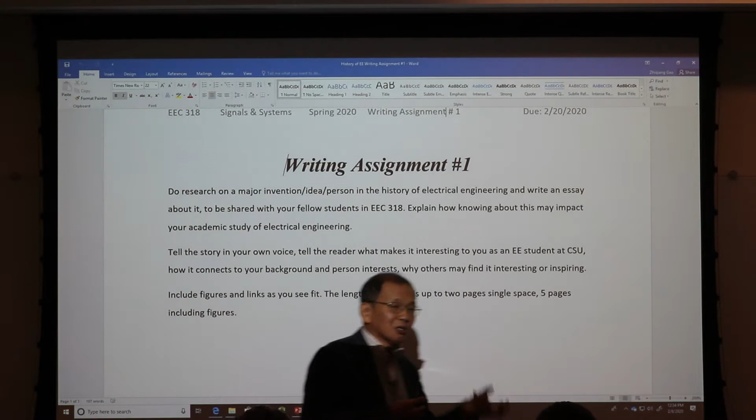So I want to use this maybe as a way to help you rediscover your passion for learning, after all these courses in science, mathematics, chemistry, physics, where the stuff is crammed down on you. I want you to rediscover, hey, I study engineering because of this. I study engineering because I one day want to make a discovery, however small, a discovery, something hasn't been done before.

So this is the general motivation behind it. Going forward, I'd like to use this maybe as a starting point to write a script. Based on your essay, maybe write a script, produce a 3-minute video by the end of the semester. Tell your story. Tell your story to the world.

Okay, and that's an individual effort. And team-wise, you have 9 teams, so everyone on your team write something, right? And maybe the team together can decide we want to produce a team video related to our project. So that's up to you, that's up to the team.

But this is an individual one. I want to see from everyone. I want to know about you. I want to see what you did. I want to see what interests you. And to some extent, I'd like to advise you on your career path.

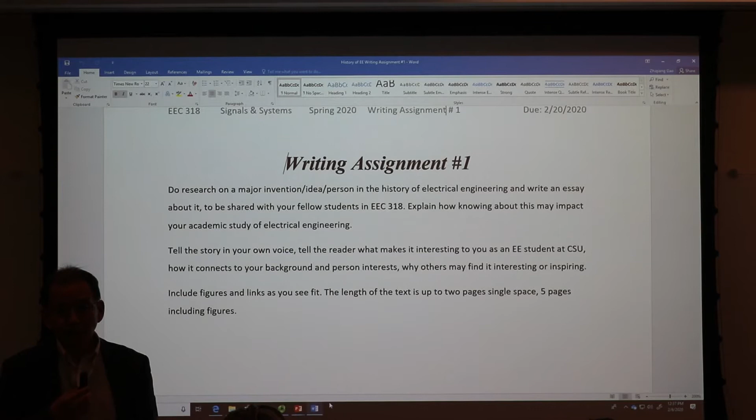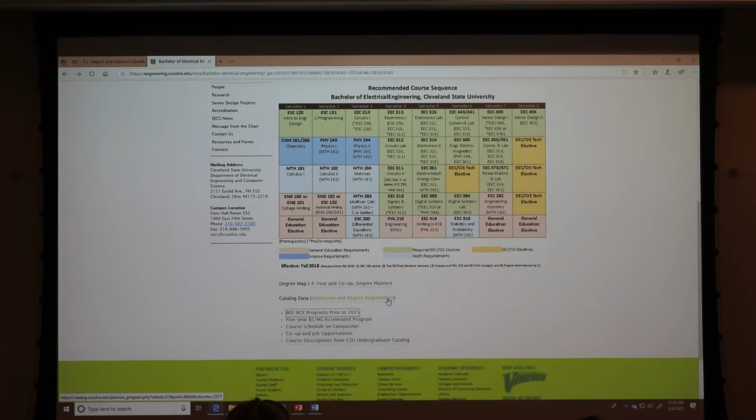Let's move on to the website. I want to go back to this chart, the degree map, where in this semester you're taking Electronics 1. I think most of you are taking Electronics 1, Circuit Lab, Circuit 2, and Signals and Systems. I want to remind you what this course covers and overlaps with these classes.

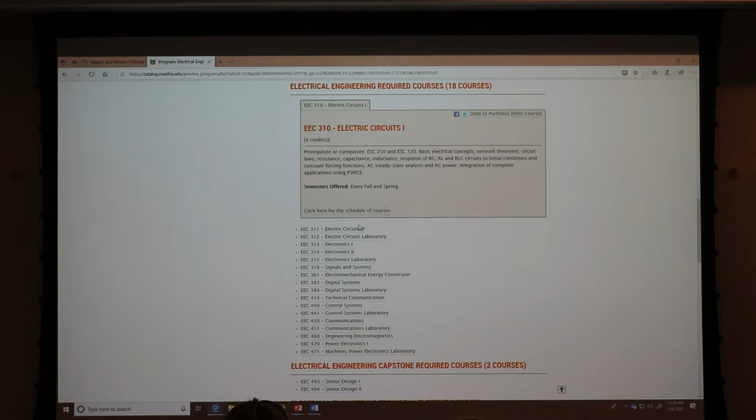For example, in Circuit 1 you already took, you used computer simulation, you used the RL circuit. I want to use that as a jumping point, and this is one you are currently taking.

You're doing AC circuits, magnetically coupled circuits, transformers, frequency response, resonance, transfer function, Fourier transforms. So that course is going to cover a lot of nuts and bolts.

Instead of repeating that here, I'm going to show you how you use it for practical purposes, to give it life, to show why such tools are important, and also who invented this and what problem they were facing.

And also in electronics, you also see frequency response. So you see this everywhere — the Bode plot, the frequency response, the Bode plot.

So here we are in signals and systems. We covered it, but we covered it in the context of engineering problems, solving engineering problems in communication, in controls. And in our case, we'll start with controls.

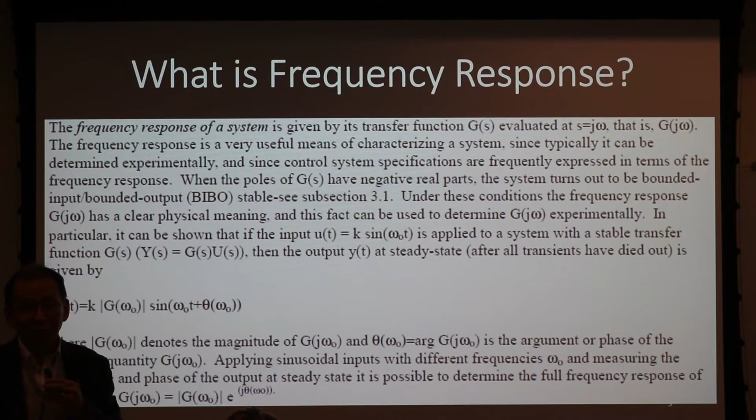Ask those seniors why they're taking this class, why they're still finding it useful. So that's frequency response in short — the short definition, the short statement. The nuts and bolts are, I think some of you already did it in your project.

You told me that you have a circuit, you derive the transfer function, and from the transfer function you set S equal to J omega, then you graph it. That's called a Bode plot.

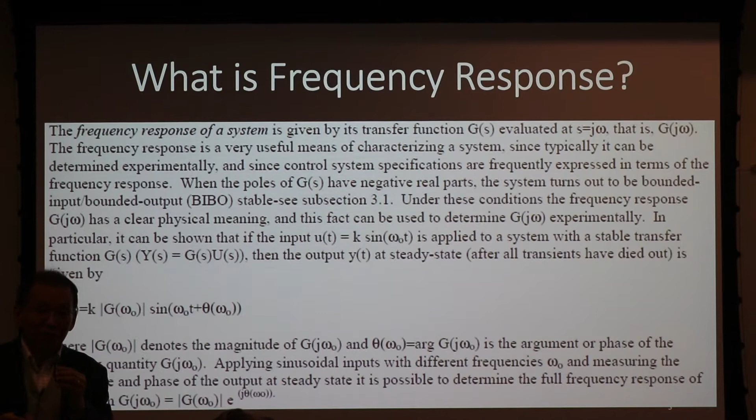Some of you already done it. Even if you haven't, it's not the end of the world. It can be done rather straightforward. Bode is known for making it simple for us — you can use straight line approximation to quickly sketch a Bode plot, a frequency response of a system, and from the sketch you already know what the system does. Simple and powerful. That's why Bode was awarded a large military contract during the Second World War.

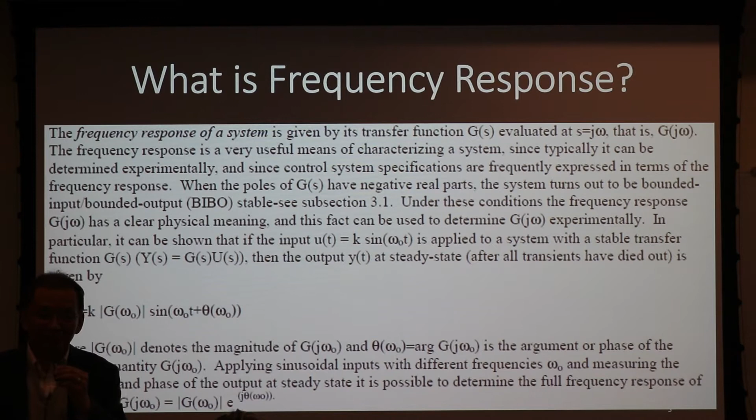He outcompeted the MIT professors who were knee-deep in mathematics. His solution, although maybe a little less superior, was so simple and intuitive that the military adopted his method. That's the Bode plot - that's why we're still talking about it today. Bode made it easy for us. We should be thankful, not afraid of it, not scared of it. There's no reason for that.

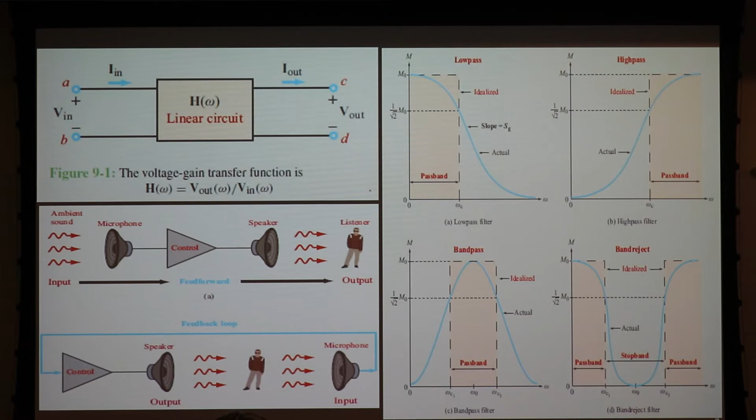So that's frequency response, and I went over this last time. Low pass, band pass, high pass - very intuitive in terms of magnitude response. And also, what does it do for us? What can we do with frequency response?

I gave you this example last time, and I'm going to use it again today, so keep it in mind. I want to refresh your memory. This is motor control, right? And this is the coil. I sub A, armature current - that's the electrical part, the power side. That's the mechanical side. You're using the motor to drive something, to drive a load, in a factory for moving parts.

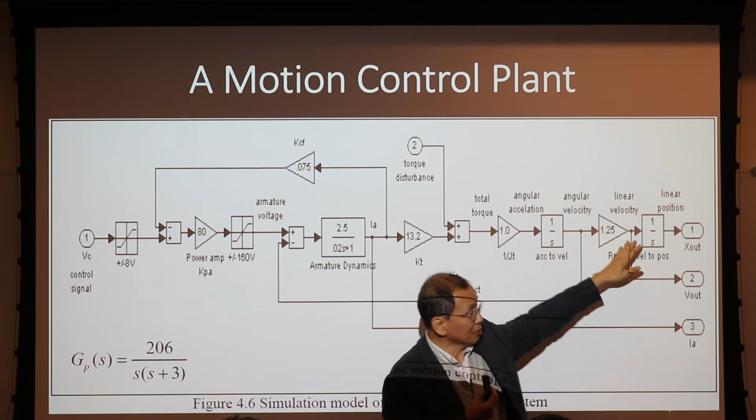Be careful - the load will have a force coming back into your system. We call it load disturbance, and the load is not easy to handle. Then the torque, the acceleration, get to a velocity, get to position after 2 integrators. So 2 integrators, and the torque becomes a final motor position.

Devin: I'm sure this might be a stupid question, but... Can I take a picture? Of course. Just don't have me in it.

For seniors, for 440, isn't this one of the problems you're solving? Could be, maybe - maybe you haven't seen it yet. So I'm giving you something that senior students see later in the semester. This is what I mean by putting the problem in front of you. Every motion control engineer faces this problem. So that brings all the attention, all the focus: what do I need to know to solve this problem, to solve it better than anybody else?

Let me ask you a question. I give you a simplified model, and I said this model can be explained from a frequency response. How? We know given the transfer function, make S equal j omega, and then you can graph it - that's how you go from transfer function to frequency response. But it seems that I suggested the reverse: that this is the system, this is the input, there's the output, and I can go by definition of frequency response and find this transfer function. How do I do that?

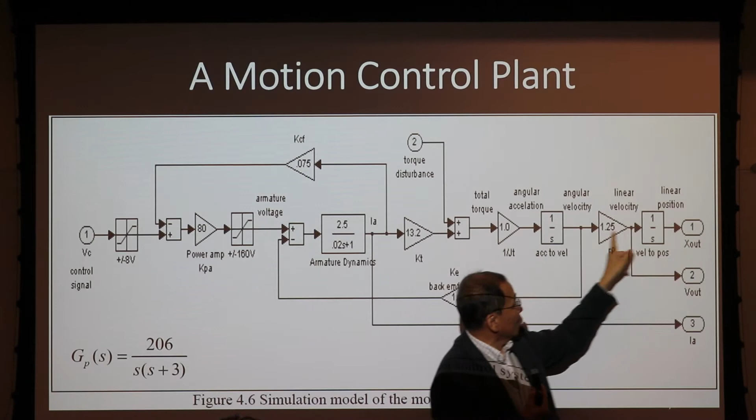Inject a known sinusoid into the voltage here. And then what? Either compare the output here or take the velocity from here. I actually did this 30 years ago in the lab when I was a TA. There was a DC motor, and I put a signal generator's output to the voltage input of the power amplifier, and I changed the frequency. Then I get a set of points, I connect them, and I get a Bode plot. From the Bode plot, I can get the transfer function.

Very easy - no physics. We don't have to be a physicist to understand how the motor works. We don't even have to know Newton's law of motion. A lazy method, but nonetheless very effective. There's one overhanging question though - you should have observed and asked it, but maybe you're not used to it yet. Let me tell you what question you should have asked.

Look at this diagram - how many S do we have in there? How many terms have S in the denominator? Two or three? So yeah, these two are obvious: from torque to position, motion, Newton's motion - you give a force proportional to acceleration, but from acceleration to velocity is an integrator, and from velocity to position is another integrator.

So these are obvious in the motion system on the mechanical side. But what about the electrical side? Do we have some dynamic there? Do we have energy storage? We do - that's the coil, that coil in the motor. Derek, you showed us the coil last time, right? That's an energy storage device - that's got to have S in there, at least one. See? Engineering is not difficult, it's intuitive - unless it's taught by a mathematician.

So we have three energy storage, or three dynamic components in here. One is the motor. Look at this. You see the transfer function 2.5 over 0.02S, 0.02S plus 1.

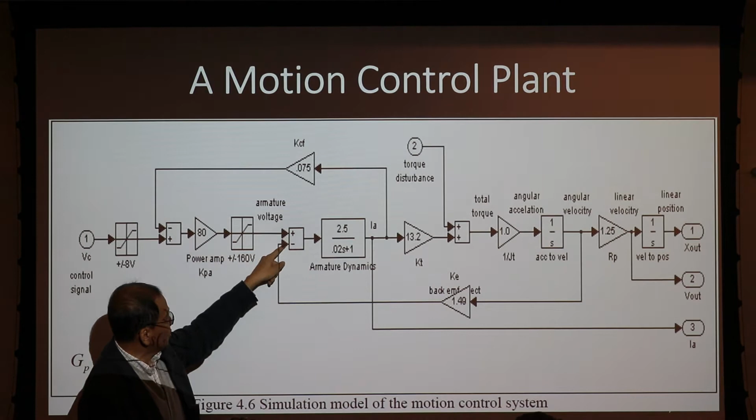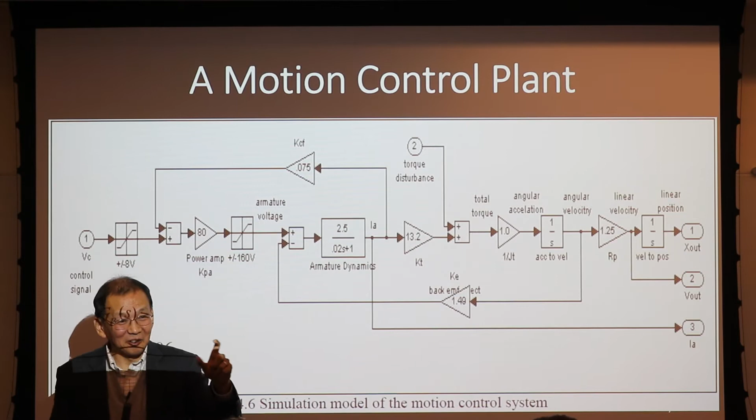So you have voltage coming in, and you have current going out. That's your coil, no? It's a coil. It's an inductor, we just wrote it differently, but it's a coil, right? So that's the transfer function of a coil. You put the voltage in, you get current out.

See? Mathematics is easy if we know what is going on. But the connection is powerful. There are many people who can see the coil, who can touch the coil, hopefully without electricity in it, but not able to see the mathematics, not able to think about it as an inductor, as an AC circuit.

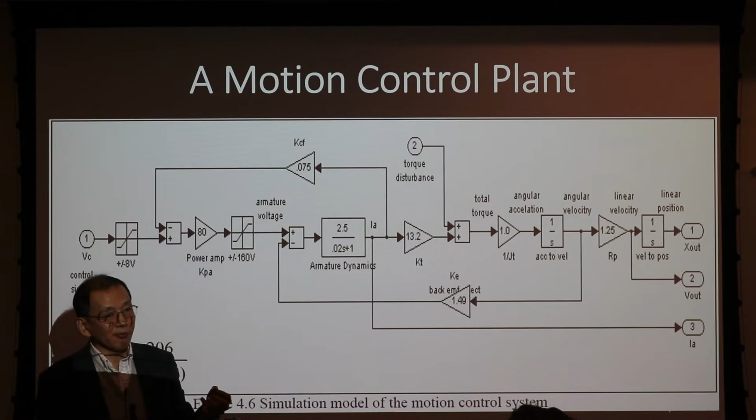So being able to write the transfer function is knowledge all electrical engineers must have. And this is your circuit. Come on, this is a circuit, right? You have an inductor. You put the voltage in here, you induce a current, right? So what's the transfer function?

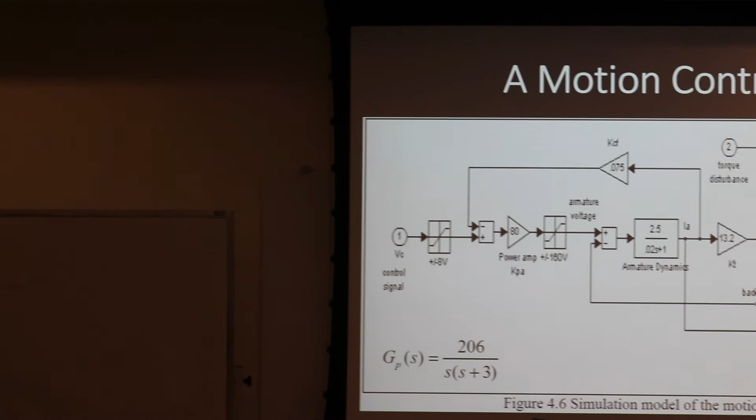What's the transfer function? Let's call it V of S. Let's call it I of S, the current. Right? So what is the current? What is the transfer function of the output over the input?

So the impedance is L times S, right? That's the impedance in frequency domain. Then you avoid the differential equation altogether, right? And the impedance of this is R. So what is this?

The voltage drop. That's a loop, right? So the voltage drop, this is IA times R, right? That's voltage drop here. The voltage drop here is what? IA times SL, right? Yes.

This is Ohm's law generalized to impedance, right? So now I can write V of S equals IA of S times R plus SL. No? Yes?

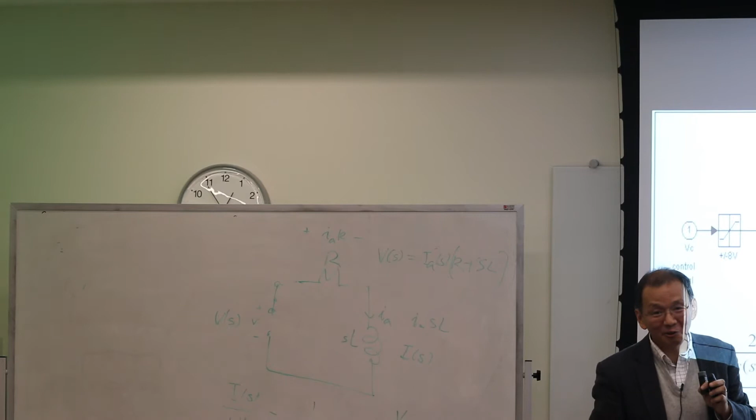That's where you get this. That's how you get this. That's a transfer function. Can you do it? Can you do it yourself? Yeah, probably yes, right? Probably yes. That's your quiz question. That will be in your quiz, that will be in your exam, in some variations.

You like that? There's no surprises. This is the engineering skill we are trying to let you have, not some hoops to let you jump through. And everything we do for a purpose. So getting so now we see the transfer function of this, and represent a real physical device.

Right? Moreover, I look at this transfer function, I see a time constant. Do you see a time constant? I see a time constant. And this time constant tells me how fast this inductor is charging.

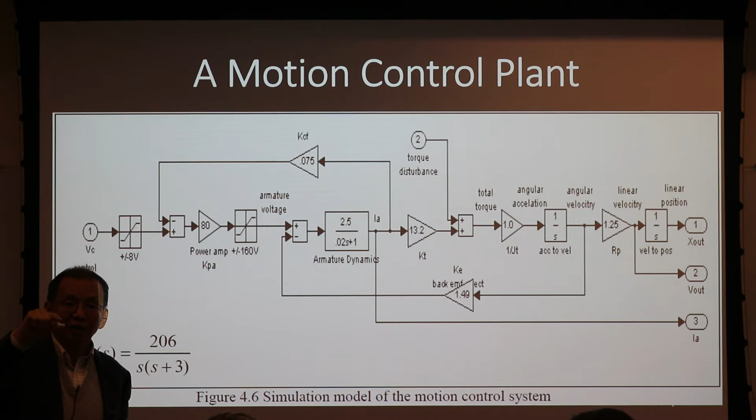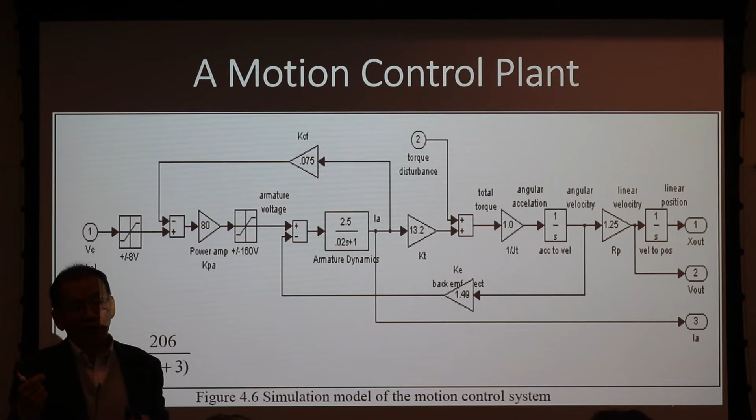I put the voltage, say 1 volt in there. How many seconds does it take for the inductor to be fully charged? From the transfer function, I can see that it takes about 0.08 second, 80 milliseconds to charge this inductor. Do you know how I can tell? Do you know that?

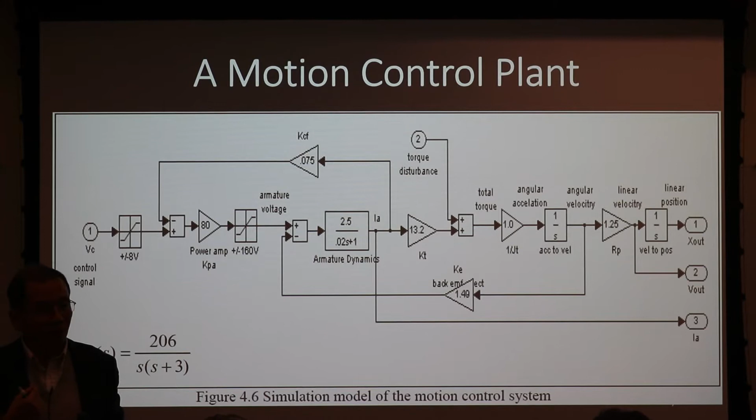What's the 80 inside that power amplifier? No, it had nothing to do with that. It had everything to do with this. So this is another thing that I'm not going to go into details because these are nuts and bolts that you will learn from other courses.

But I can tell you this: if I have a transfer function like this, first order transfer function, okay? I can show you mathematically, although I won't do it here. If I give a step input, my output is going to be like this. And based on the transfer function, I know the steady state value of this is k. And the amount of time it takes is 4 times tau. Again, I can show you mathematically, it's very easy.

Okay? But that's not the point. It's not about how do we prove it. I just want to show you with simple mathematics manipulation, I can show that given a transfer function like this, I can quickly tell you what the system is doing. The system is going to be charged to a constant value of k, and it's going to take 4 times tau. Tau is the time constant, and it takes 4 times the time constant to be fully charged. Actually, to be charged 98%, to be precise. But engineering-wise, it's fully charged.

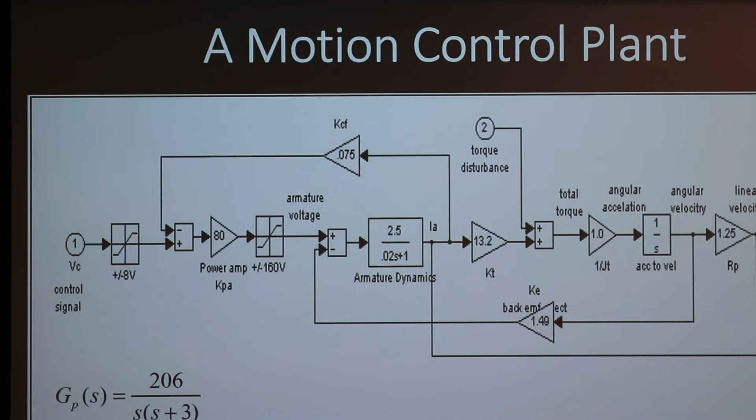That's important, right? Because there's a timing requirement for me to move something from point A to point B. I need to know how fast I can move things, and this is the critical number, right?

But it doesn't show up in here. This number doesn't show up in here. So I ask you why. Why is it I have 3 energy storage devices here, and I end up with a second order transfer function, and here I have a time constant of 20 milliseconds, and it doesn't show up in here.

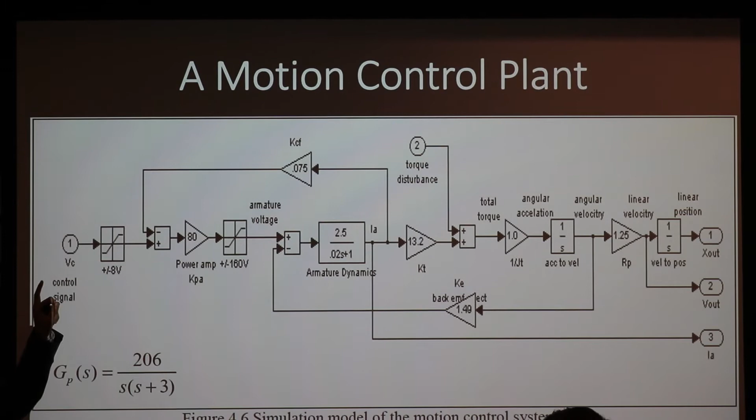It turned out if you do frequency response, your response is dominated by the mechanical side. The mechanical side is much slower than the electrical side. The motor is much faster than the movement.

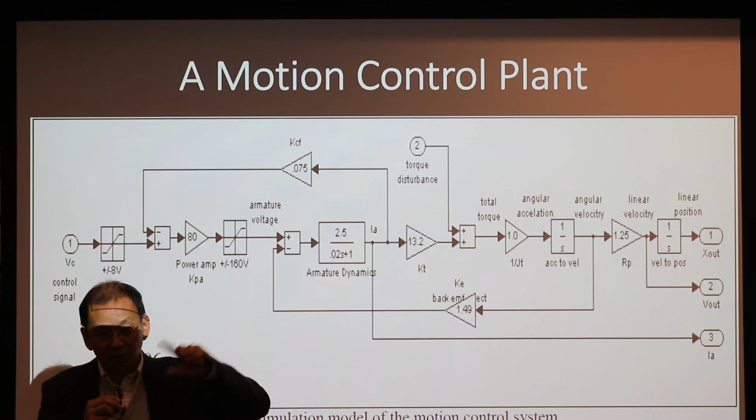So therefore, for the most part, most of the time we can get away with ignoring the dynamics of the electrical side. How do we ignore it? How do we ignore it? We treat this duration, 80 milliseconds, like nothing, because when we move the stuff, our movement is about in the range of 1 second.

1 second, we can move from point A to point B. That's pretty good. That's generally the acceptable industrial response time. Compared to 1 second, which is 1,000 milliseconds, 80 milliseconds is nothing, okay?

So therefore, engineering, not physicists. Physicists will go crazy - can you ignore that? Come on, we build a $1 billion accelerator just to find out what's going on, and you ignore it? Right? So that's a very different mentality. But engineering, we try to get away with what we can get away with.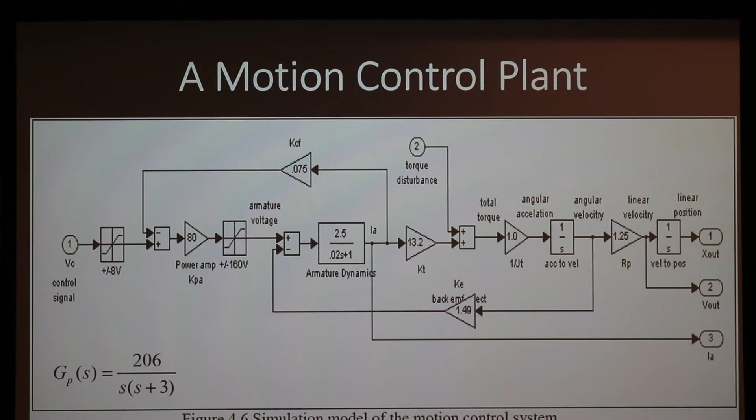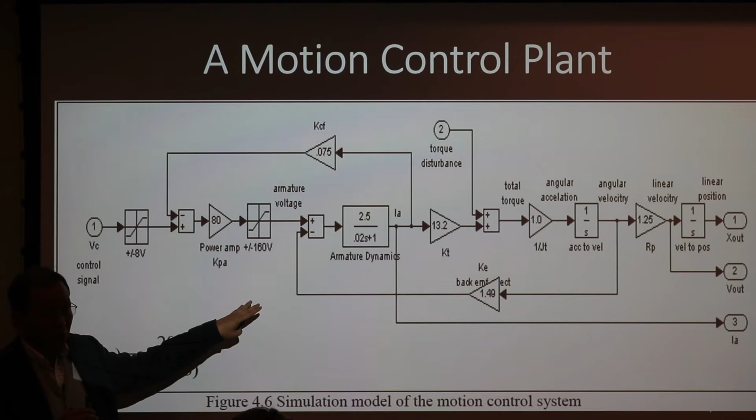Is there a way besides the Bode plot that comes up with that transfer function? There is one, and for that you have to ask Dr. Li Didong about a project he did for a local firm manufacturing automobile and motorcycle pistons. This is the Simulink model he established for that system, and this is the transfer function.

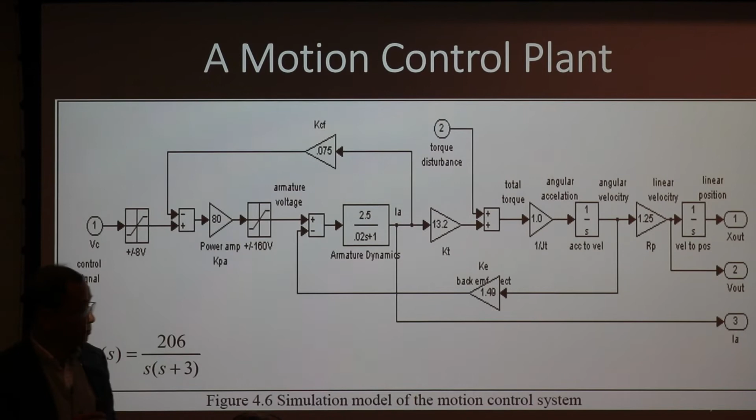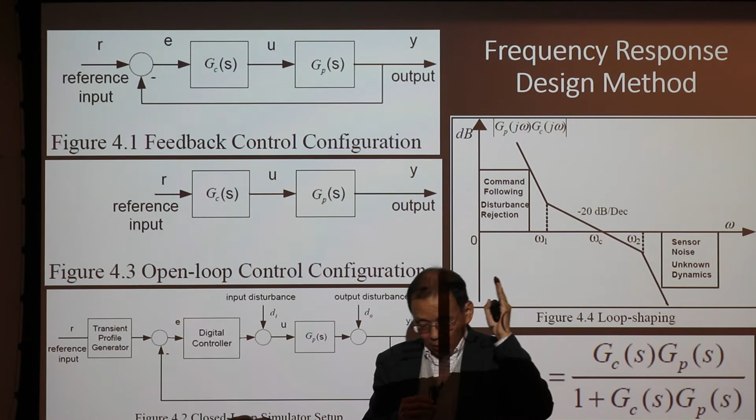And in 440, I assume that you learn a technique called frequency response based design. The central concept of that is: say this is your closed loop bandwidth requirement. Your design specification will tell you how fast the closed loop bandwidth has to be, and this is your open loop response.

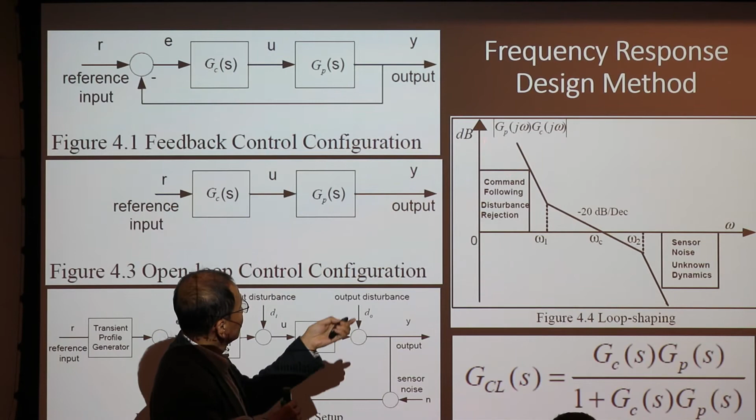Where is it? This is your open loop response: GP times GC. GP is given, GC is what you design. So this is the design principle that we're going to follow, right?

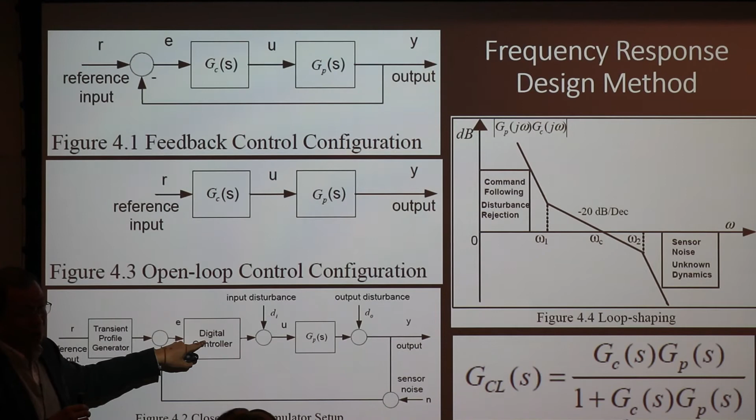Later on this semester, I'm going to teach you how to convert your solution from analog to digital, but that's relatively straightforward. It's this part that requires some attention.

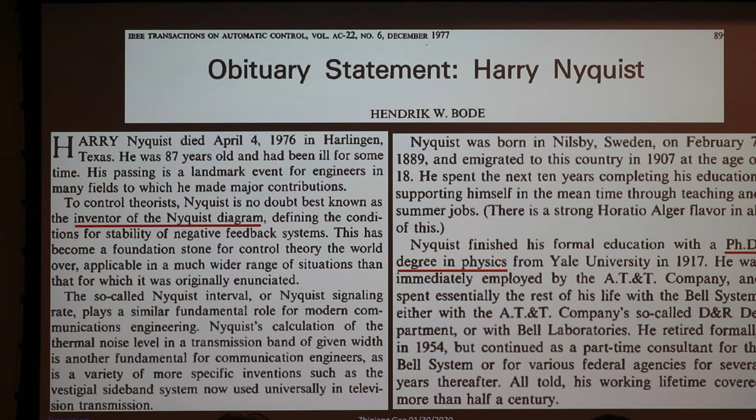Okay, so this is what we did last time. We also talked about understanding where Bode was coming from, and what Nyquist did. We're going to use the Nyquist method. The Nyquist method is based on frequency response, so I'm going to show you how that is done. And this is the way we covered it last time.

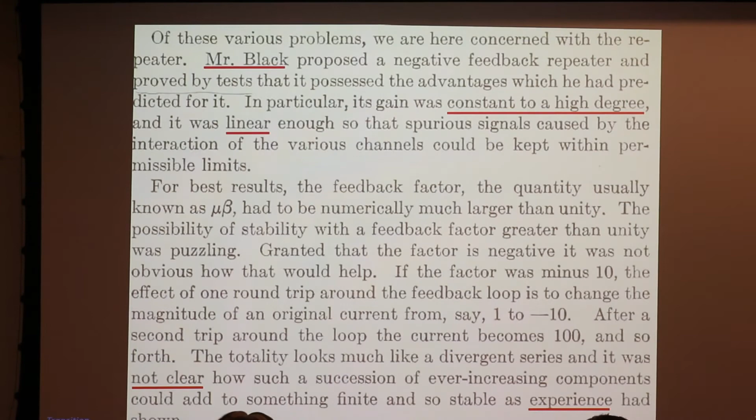And this is, in Nyquist's own words, that he derived all this mathematics just to find a stability condition that agrees with experimental findings. So he was a great engineer, able to use mathematics to its full extent and explain what up to that point was unexplainable - that's the Nyquist plot.

The Nyquist plot is going to be discussed in detail in 440, but I'm going to give you a taste of what it's like.

Nyquist published his paper in 1932, 5 years after the invention of negative feedback. He was compelled to do it because nobody could explain why negative feedback goes unstable sometimes. And this became a seminal paper, collected in a book in 2001 titled 25 Seminal Papers in Control Theory.

I would even go further - I think this is the most important paper in control theory. Okay, nothing compares to this. But again, that's my own opinion, and it's extremely intuitive.

So this is an amplifier, the Black amplifier, and when you hook up the output to the input, great things happen - negative feedback. You have a constant gain, the gain doesn't vary anymore, and you have linearity. Two most important characteristics you could want from an amplifier circuit.

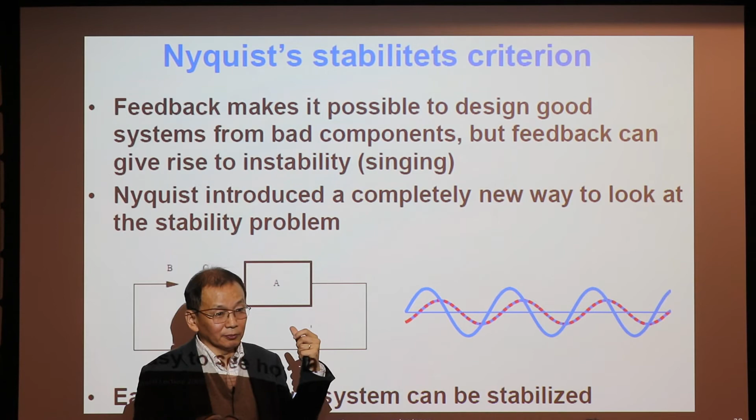If you're amplifying and it's lagging, then you close the loop—no, don't do that, your amplifier is going to ring, it's not going to work. So that's an experimental discovery. We don't need any mathematics to see it, to see the pattern. But what we are lacking is the mathematical understanding of what causes that, and more importantly, how do we modify the circuit so it doesn't do that?

Okay, so that's Nyquist, that's his theory. He tells us from the frequency response, based on the frequency response of this amplifier without feedback, he can tell you whether or not, when you close the loop, it will be stable or not. Based on his condition, we can go and modify the circuit in the amplifier so it becomes stable if it's unstable. Moreover, even if it's stable, we can still measure how stable it is.

How close is it to being unstable? That's the contribution of Nyquist, and it's all illustrated in this particular diagram. This diagram is so intuitive: you just cut the feedback loop, send a bunch of sinusoids into your loop, and collect the output. If at any frequency the amplification is larger than 1 and the phase lag is 180 degrees or more, you are sure you have an unstable closed loop amplifier.

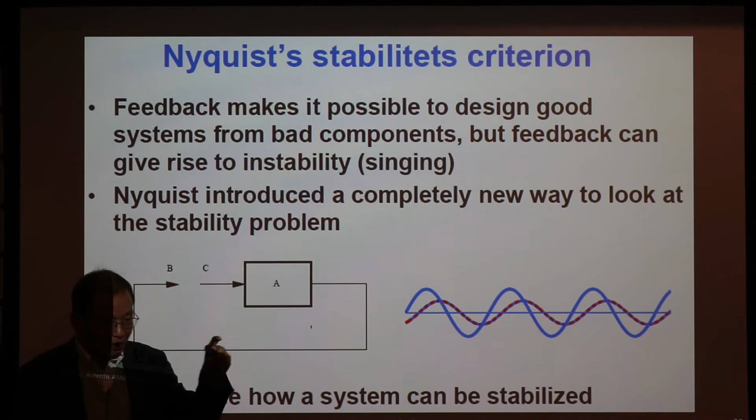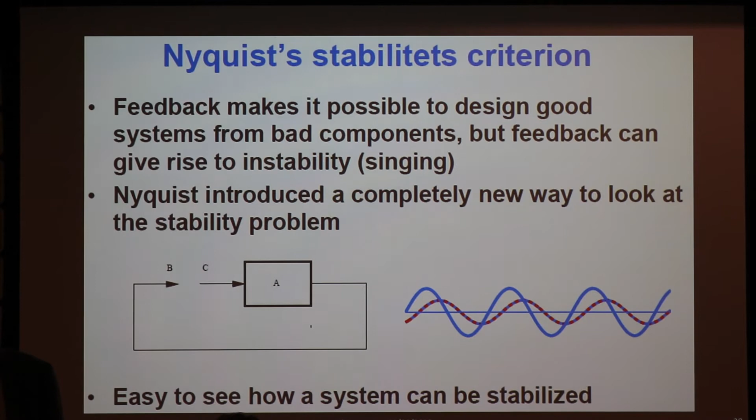Okay, so that's Nyquist's stability condition in a nutshell. Cut it, look at this open loop, send the sinusoidal to it, and if at any frequency amplification is larger than 1, and the phase shift is larger than 180 degrees, cut it, change it. Right? And that's unheard of. Right?

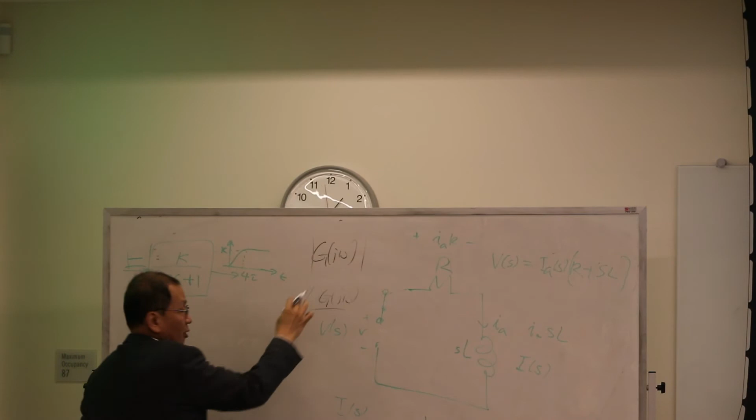So this is not a Bode plot anymore. Bode plot is magnitude versus frequency, angle versus frequency. Here, this is real, this is imaginary. But it doesn't stop you from plotting this and this together. At each frequency, it's a point on the complex plane.

Thank you. Yeah. Okay.

So what does the... we say we have a transfer function. We have a transfer function of 206 over s times s plus 3. Right?

And we make S equal j omega, and this is our frequency response. Right? It's a complex function. So this thing has a magnitude and this has an angle. For every frequency, it's a complex number, right? Yes?

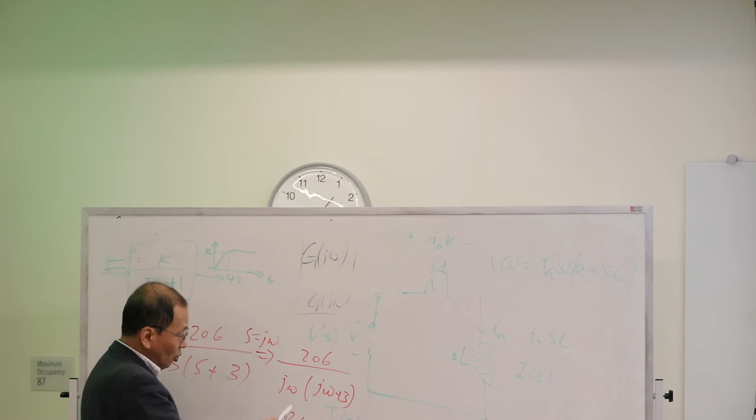So how does it look if I graph this frequency response for omega from 0 to infinity? What does it look like? And that's what is being graphed.

Let me tell you, if you pay attention, it's not difficult. If you don't pay attention and you read books on it, it's going to take you weeks. Okay, on average, maybe you're smart, days. Okay? But on average, weeks. This is why when I teach this stuff, people don't read books, because they make a mess. And for most textbooks on this, they made a mess out of this.

I'm going to show you in a simple, concise, easy way how to graph this. It's easy. Now, when omega is 0, you have a constant, about 70, and it doesn't matter. But what I want to see is when omega goes from very small to very large. When omega is much less than 1, this is what? This is very large, this corresponds to 206 over j omega, and this is very small, so you can ignore that, times 3.

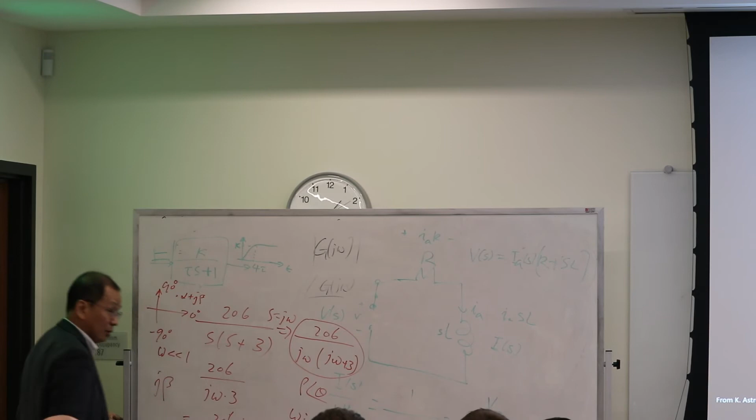You follow me? You follow me? If you don't follow me in the back row, plan for 2 hours of reading tonight to understand this.

Okay? So initially, omega is small. This is like 90 degrees, minus 90 degrees. And the magnitude is almost infinite, because when this goes to 0, this is infinite, right? So that's what you're seeing here, that this is 90 degrees, way down there. And that's your initial position, when omega is approximately equal to 0.

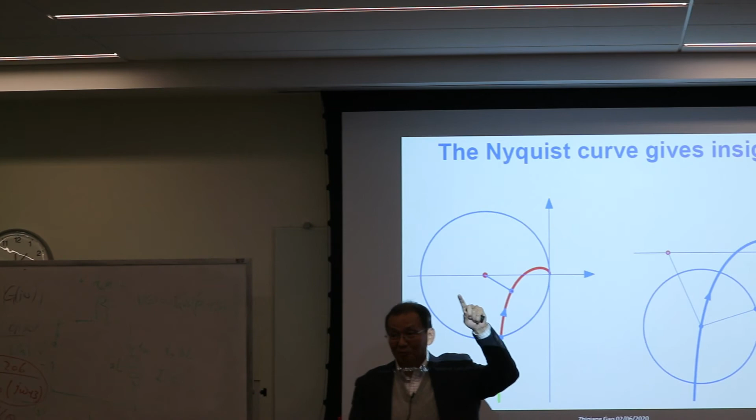As omega increases, the magnitude will decrease. Go back to this. As omega increases, your denominator becomes larger and larger. Eventually it becomes 0. When omega goes to infinity, let's come to this point, the magnitude equals 0. So now you have two extremes. Initially you were way down there at minus 90. When omega becomes very large, you are here. It doesn't matter what the angle is, excuse me, you're at the origin.

Why is the real number considered negative then? Why are both of them in? Well, if you graph this... If alpha and beta are both positive, you are here. I'm assuming this. So if alpha is 0, you are here, j beta. If beta is negative, you are here.

So that's what I got here. This is equal to that, and this is J, and this is your beta. Your beta is a negative number, so you're down here. And when omega is very small, you're way down there.

You follow me? This is not difficult. Nyquist plot is not difficult. But the book—I have not seen one book get it right, in terms of making it easy to understand. It's a mess.

Okay, so that's the general shape. This will start with almost negative J infinity, and gradually it becomes 0. This is omega much less than 1. This is omega much larger than 1. So you have two extremes.

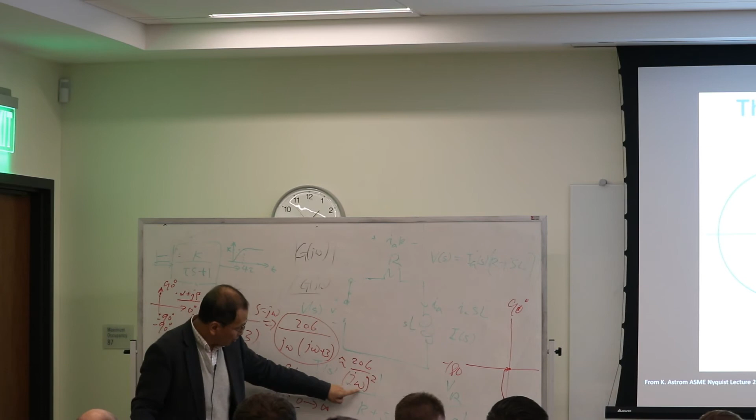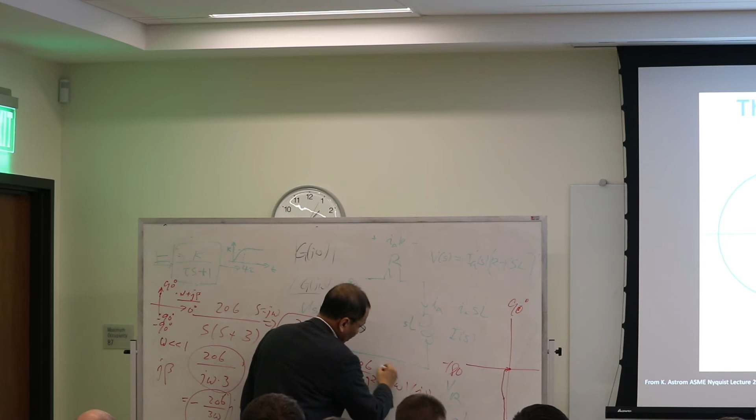Why does it approach the origin from negative 90, from negative 180? Because when omega becomes very, very large, this is approximately equal to 206 over J omega squared. You can ignore the 3 when omega becomes very large, so this is J omega squared. Now J omega squared—these are two J omegas in the denominator. Each one gives you minus 90 degrees.

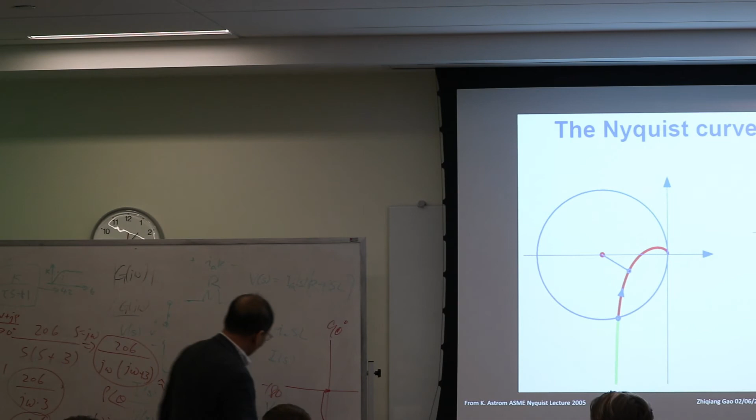So two of them together give you negative 180, which means it's negative 1 omega squared. That's negative 180—that's a negative number. That negative number is the negative 180. But this is somebody else's plot. For our transfer function, it's going to approach the origin from negative 180.

Okay, that's it. That's our Nyquist plot. That's our frequency plot. That's not a Bode plot, because Bode is plotting versus frequency. This is plotting real versus imaginary. So we're looking at the rho and theta. That's how we plot it.

Is there a significance to when it crosses the real axis? Very significant, yes. That's what I'm going to talk about next.

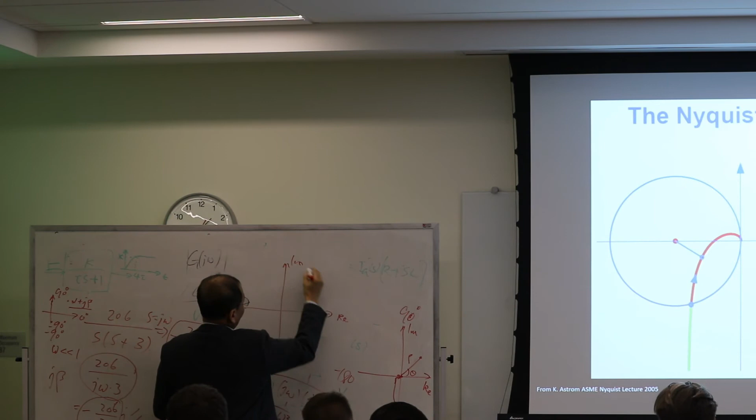So what did Nyquist say? Well, Nyquist said that on this plot, on this complex plane, you graph this. And on this complex plane—this is like a graph like this—the stability of the feedback amplifier depends on this fact.

This is the negative 1, 0 point, and that's the red dots here. This is the critical point. As long as your graph doesn't get anywhere near this, you're stable. What is this point anyway?

Magnitude equals 1. Rho is magnitude, rho equals 1. The system becomes unstable when you have this condition. And Nyquist proved it mathematically, and this corresponds to the negative 1, 0 point.

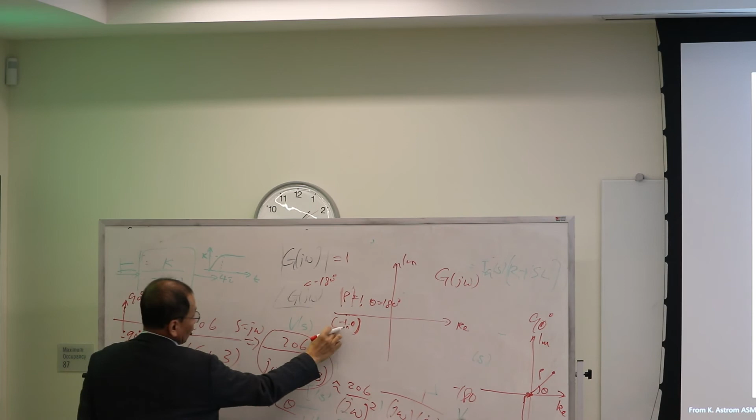Negative 1—this is a complex point, right? The real part is negative 1, the imaginary part is 0, and that's this representation. Okay, alpha equals minus 1, beta equals 0, and this defines

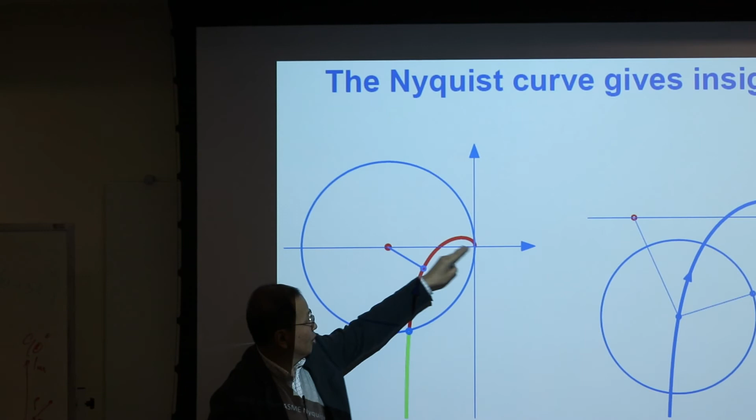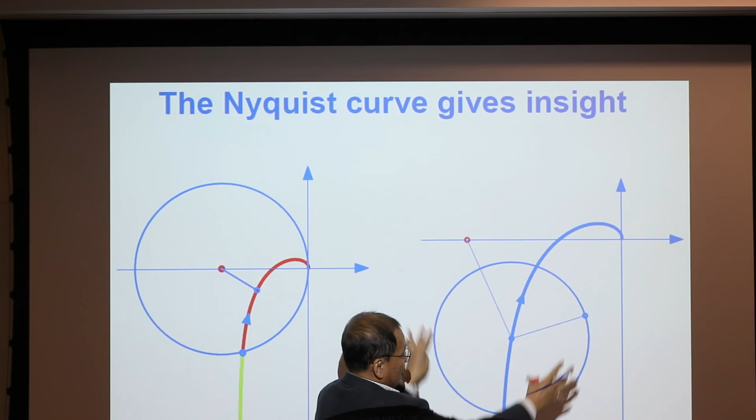this point on the frequency plot. If your frequency response plot doesn't get anywhere close to this, you're stable. If it's going to the origin inside of this, you're stable. If your frequency response plot, even though you don't graph it accurately, as long as the circle representing uncertainty doesn't overlap this point, you're stable.

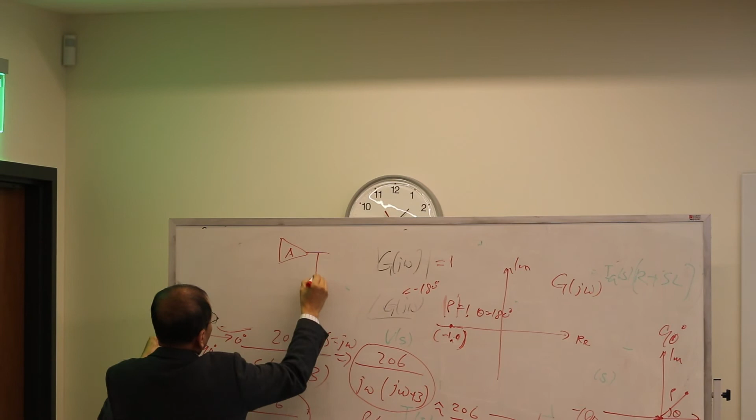All you need is to graph it, then you know. And if you're not happy with this plot, you have a choice. In the amplifier design, you can redesign your amplifier. If this graph is not good, redesign this. That's what Nyquist theory tells you.

How do you redesign this so that it becomes good? In our case, we cannot redesign the plant in the controls case, but we can redesign the controller. We have a GP and a GC. GP is given, GC is to be designed in the control system. So all we need is to understand how do we design GC so that GC times GP—in this case G equals GC GP—gives us a good plot.

Okay, so what we are graphing is this—what we are graphing is GP. And we're seeing this, which is not bad.

But in order for us to control the system well, GP is 206 over S times S plus 3.

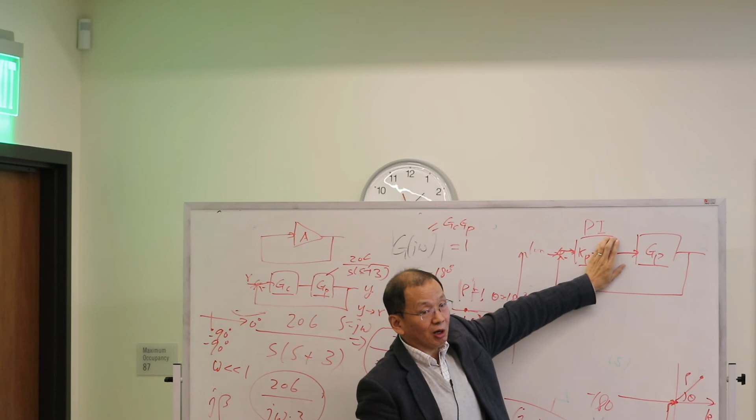Well, if you're practicing control engineering for 20, 30 years, your immediate solution is this. This is your GP, and this is called a PI controller. This goes way back to James Watt, who invented the flyball governor, giving you a KP, a proportional controller.

But a proportional controller doesn't work well if you have a load disturbance coming in. Engineers found we always have load disturbance, be it friction or something introduced by the load. We're using a motor to drive a load, and it comes back to us with a disturbance, and our control has to overcome it. This is normally a constant disturbance, and to overcome it you must use integral control. Everyone knows that in the control industry. I'll let Professor Li Dong cover the details in controls class, but take my word for it, this controller has been working for over 100 years - PID or PI, mostly PI.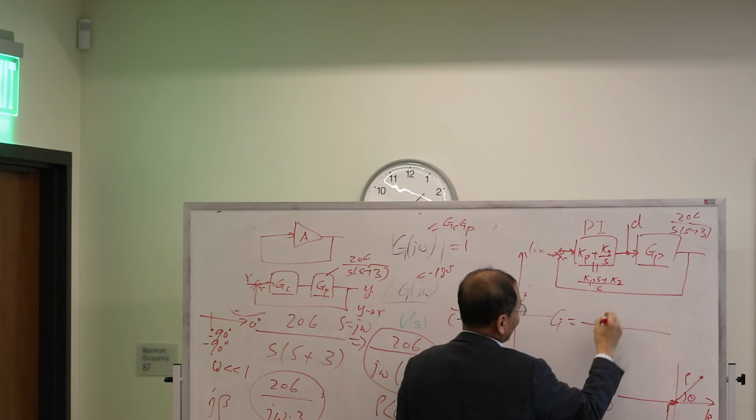This introduced a twist, because if you combine this with 206 over S plus 3, you got a problem. Now our controller G equals GC times GP. So this transfer function is KPS plus Ki. So now our GC and GP all together give you KPS plus Ki times 206, over S times S plus 3. That's our new G, the new open loop transfer function, GC times GP.

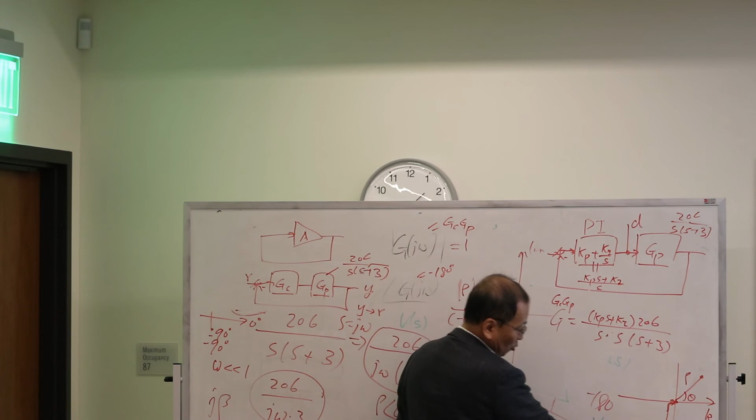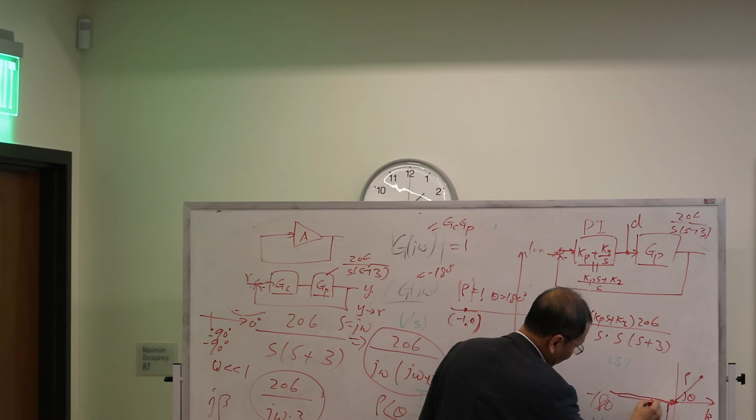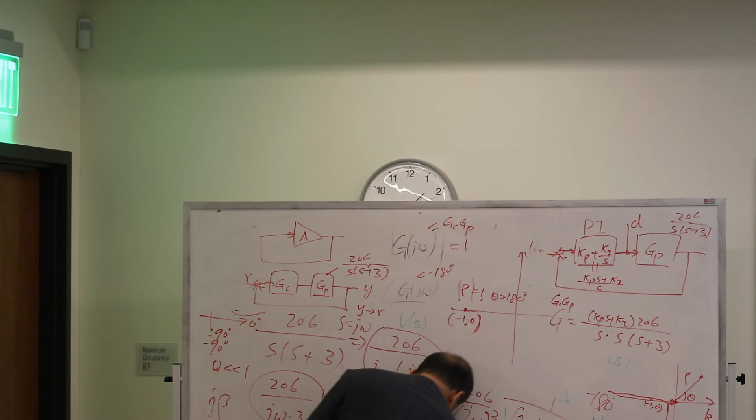Instead of looking like before, now it's different. Instead of 1 over S, you have 1 over S squared. So initially, when omega is very small, instead of 90 or minus 90 degrees, you get minus 90, minus 180 degrees. So it could come in like this and shape like this, and this is that negative one point. And that's bad - it could do this, or it could do the other. The other possibility is it does this. They still end up at the origin, but they come into the origin from negative 180 and get very close to the minus 1 point.

And this is why with the PI solution, with the PI controller, this thing can easily go unstable.

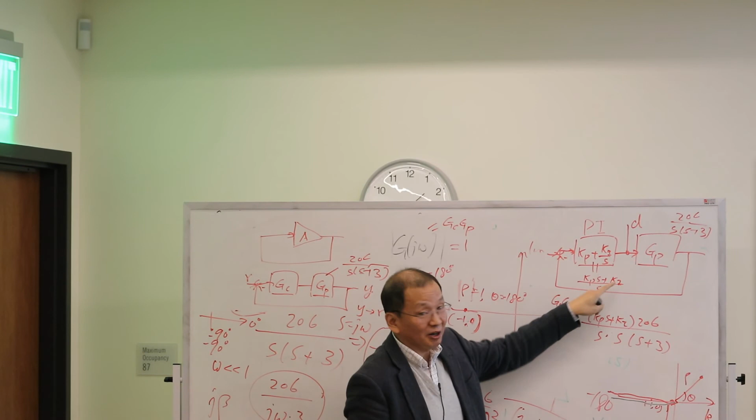So when it touches that, does it have to touch that point exactly, or when? It depends on KP and Ki. It could come from above or it could come from below. Yeah, I understand. But I'm saying, is it bad when you get near it, or when you actually touch it? Yeah. I got it.

For this, to understand the whole thing, we need to plot both the negative frequency and positive frequency, and we will see that it's the encirclement. So instead of this being just the real part, omega goes from 0 to infinity. That's a really good question.

To answer that question, I need to be a little more elaborate on the Nyquist plot. What did Nyquist say? Nyquist actually says the following.

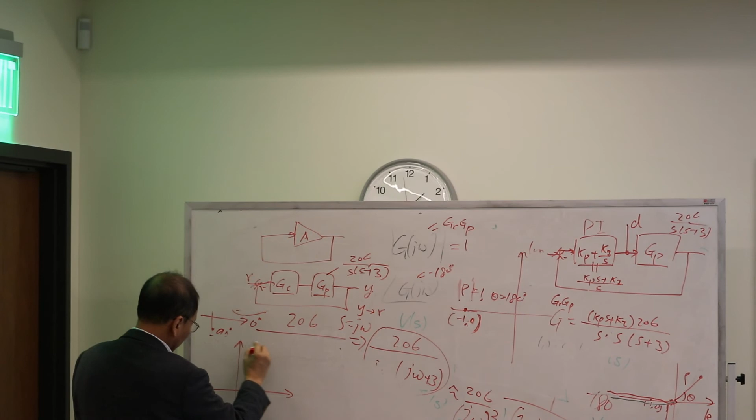Nyquist says this: on the S plane, I define the contour, a half contour - this is the right half plane. You forced me to do this, okay? I didn't plan to, but your question can only be answered if I give you the whole picture. So what's the S plane? S equals sigma plus j omega. The real part is sigma, the imaginary part is j omega.

So Nyquist defined the contour - this is part 1, this is part 2, this is part 3. Part 1 is j omega from 0 to infinity, what we used to have. Part 2 is an infinite radius, including the entire right half plane. Part 3 is omega from negative infinity to 0, the mirror image. So Nyquist said, this is called the Nyquist contour, named after Nyquist. He said, let us do this - let's go clockwise, and let's watch what G of S does.

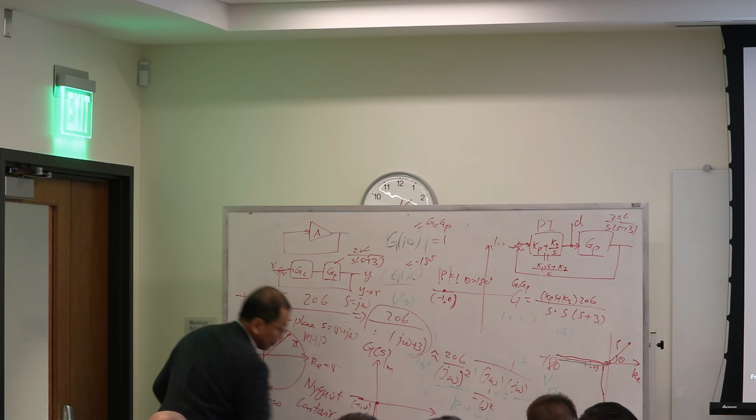So if my original plot of G of S looked like this, this is my part 1. If omega goes from here to here, that part 1 of the plot is what I just drew. Part 2, when s equals infinity, G of S stays here. Part 3, when omega goes from negative infinity to 0, that's a mirror image of this. Then you have a singularity at the origin.

You take a small contour here, and that's part 4 now. Then this thing takes this turn, a right-hand turn. Here is the right-hand turn, like you drive a car, you take a right-hand turn. Here you take a right-hand turn. That's what Nyquist mathematically proved.

Now, if this contour doesn't include the -1 point, you are safe. So if this is your original plant, if you make controller equal KP equals 1, you're safe, you're okay, this thing doesn't go unstable. However, it doesn't reject disturbance. To reject disturbance, you have to add the integral in there.

But when you add integral there, now you are doing this. Say, for example, this is your part 1, and part 3, the mirror image would be this. Then you take a right-hand turn, then you encircle this -1 point, then it becomes unstable.

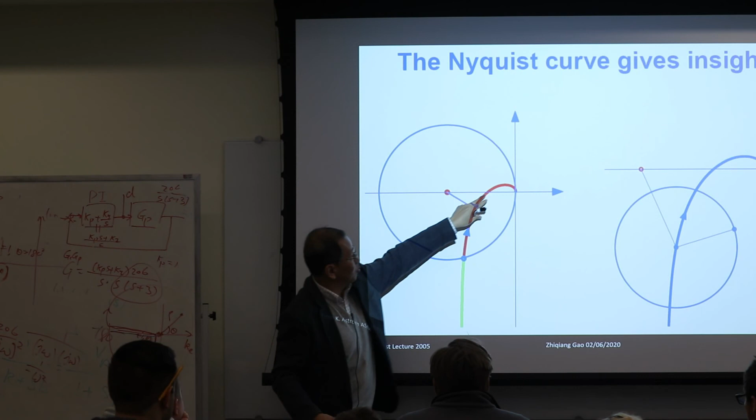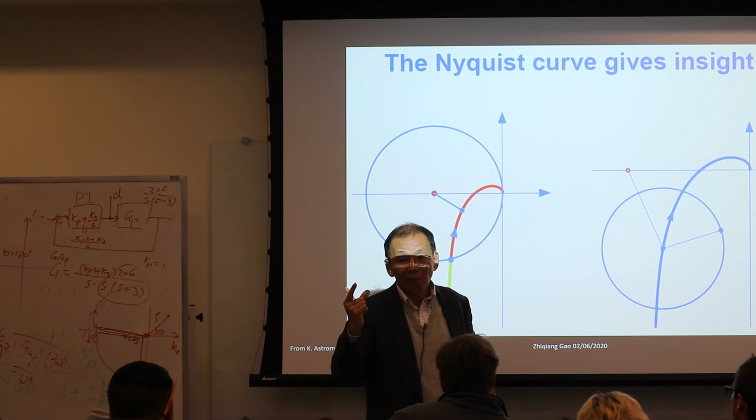If you push the gain large, say multiply by 100, this point will go over to this side, and that becomes unstable. So the Nyquist plot tells you how much room you have in gain variations. It immediately tells you the limitations, how high your feedback gain can be. And it tells you how much uncertainty you can tolerate in your gain and phase angles.

So coming back to this, what I'm showing you is you can play safe. Your system will be perfectly stable, but it doesn't perform as well as you want it to. But when you push the performance, when you add integral control, integral control will help the system make Y follow R perfectly in the steady state. This will happen in steady state, but the cost of adding integral control is making the Nyquist plot very complicated.

You can still stabilize it by manipulating the gains, or maybe by adding a lead-lag compensator, a compensation network into it. You can still manipulate it, but your stability region is very limited. Nyquist plot shows you how to do that, how to graph it, and how to use this understanding to redesign your controller, to determine KP, KI, or to determine whether or not you need a feedback compensation network.

So I went into this with a little more depth than I planned, but I hope I didn't lose you completely. The mathematical intricacy, you will learn in 440. Dr. Li Dong will be the perfect person to learn that from. But what I show you here is what Nyquist means to us, what this tells us in design.

Somebody have a question? Is this mentioned in the regeneration theory paper? Yes, it's a very hard paper to read. I have to warn you, very hard.

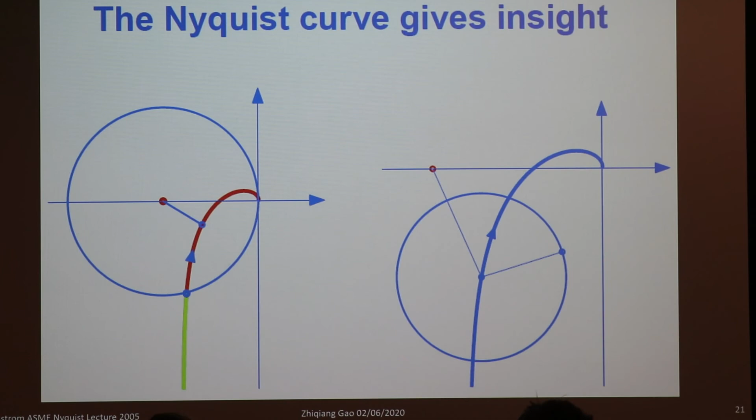So this is what people say after they were introduced to Nyquist: the knowledge of Nyquist changes control from trial and error to systematic design. So in the past we were just guessing, but now Nyquist gave us a tool to systematically go about doing it. Even if it's a PI control, we can still make it stable, but we have to be very careful.

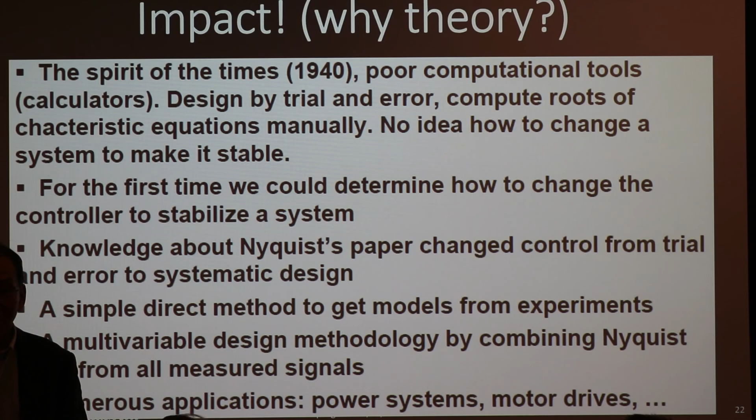And then you can ask, why is it today that most practicing engineers are still doing trial and error tuning of PID? Because most of them don't understand Nyquist. They don't understand Nyquist because although they all took controls, they never understood it to the extent that they can apply it. And so that's why, if you really understand it, it empowers you. It makes you a shoulder above everyone else.

What's going on with this? Okay, so I think our time is up, but I think we get to the point of what Nyquist can do for us. So in the next lecture, I'm going to give you a little more detail about this example.